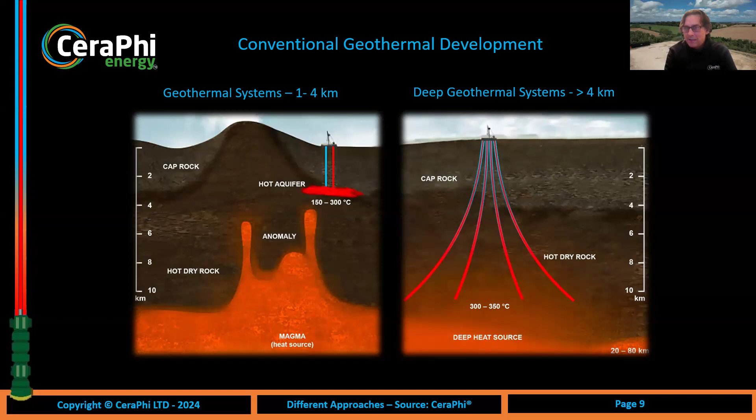But the majority of the UK is a good location for extracting heat to produce our heat networks and develop direct use heating and baseload energy.

Which basically means we don't have to go and necessarily burn gas or oil or diesel or something like that to produce heat - we can use the heat from the ground. That heat from the ground is very much the same principle as how ground source heat pumps work nowadays, but they're generally only drilled quite shallow, down to a few hundred meters, if that.

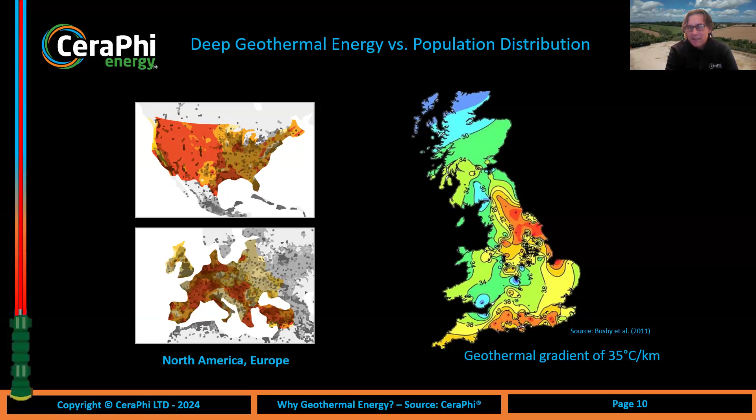You'll see if you look at the maps on the left-hand side, Europe and the US - there's lots of hotspots where it comes to geothermal energy, specifically around Central Europe and going down into Spain, over towards Turkey. There's a huge amount of opportunity across Europe and in a lot of the US, specifically the South Coast down to Texas, and over towards the western side of the US, where a lot of the US geothermal projects are currently being developed - what they call the Geysers area of California, etc.

There's a lot of different approaches to develop geothermal, and our approach is what we call a closed loop system. I mentioned the F word earlier - fracking - which a lot of people in our region in Yorkshire know very well, a word that has created a lot of turmoil over many years for various reasons. One of the things we eliminate by doing closed loop is that we don't have to frack, or use the fracking process to stimulate energy recovery, because we're not using the subsurface in the same way as you would if you were drilling conventional wells and flowing systems through them.

So we try to keep things very simple, drilling straight wells into the ground to a measured depth that we need to go to - I'll come onto that in a minute. Generally, once we do that, we then completely case and line the well itself, so we don't have any connection with the subsurface at all.

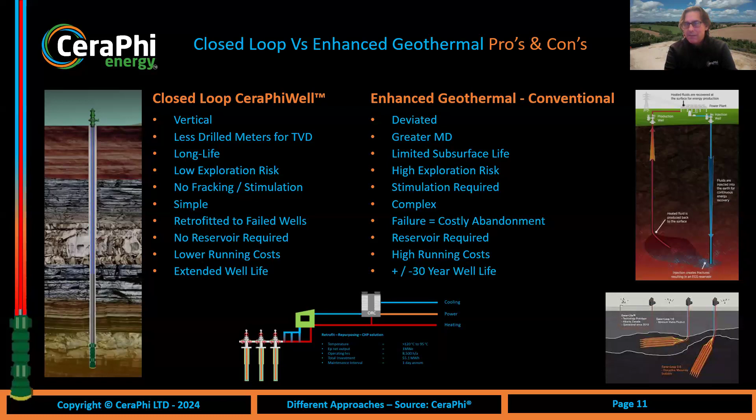So coming on to our technology a little bit now in how it works, very simply, it's like a tube in a tube process. We would ideally drill a well, or in the case of what we did at Kirby Misperton, the KM8 site, we already had a well. So what we did there is we just plugged the hole at the bottom of the well and used the well itself as the hole, without having to drill from scratch.

But let's look at the scenarios. If we were drilling a well, we would drill down to a measured depth that's required. That depth can be anything from 500 meters, maybe down to several kilometers in some cases. Our sweet spot of drilling depth for heat networks is normally between 1,500 and 2,000 meters. I say sweet spot because that gives us the working temperature we require to successfully manage what we call an ambient loop heat network system, suitable for putting multiple connections into properties, homes, larger commercial buildings, or infrastructure.

The actual closed loop system we install uses plastic pipe. So we are working with lighter materials, more advanced plastics, polypropylenes, these types of materials, which are getting better and better at thermal conduction and thermal insulation, meaning we get better properties and characteristics for the management of flow of materials and fluids around the system.

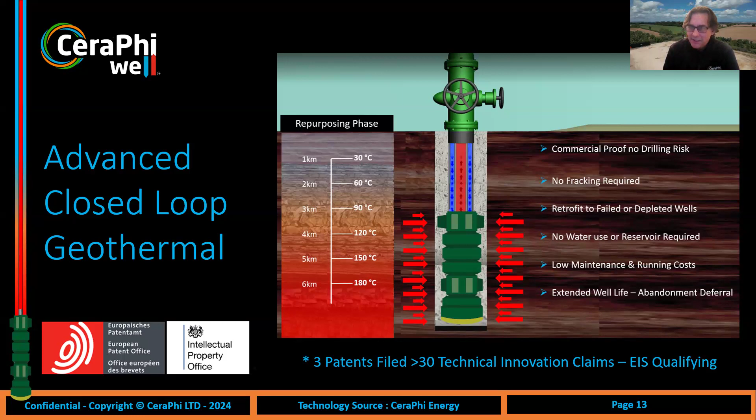And also, this pipe is a lot cheaper to make. It's a lot more environmentally friendly because, although it's plastic, it lasts a long while and it's fully recyclable. So you can actually use it over and over again, as opposed to creating a larger carbon footprint with manufactured steel piping. Also, you don't have the need to treat plastic pipe the same as steel pipe, with chemicals and corrosion inhibitors and things like this. So there's lots of benefit to using plastic pipe, which is one of the reasons we do this.

We work with what we call high, medium, and low temperature thresholds. I want to focus more here on the medium and low temperatures rather than the high, because high temperature is pretty unrealistic in most areas in the UK. So we are dealing with a medium and lower temperature rollout of technology here in the UK. But just to give you an insight, I've got slides here to show a higher temperature application we are looking at in the process.

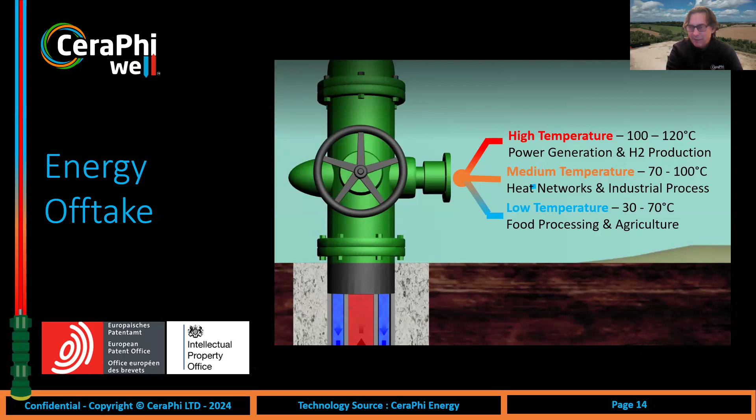Looking at medium and low temperatures, we can work with anything from around 30 degrees upwards. That 30 degrees is more than adequate for working with a heat network, a smaller heat network system, specifically into a village or a small community. 30 degrees is more than sufficient to carry enough energy to give people a very good quality energy from a base load perspective.

So we are an energy company. We develop energy infrastructure, and we are pushing ourselves to become a utility business moving forward. We don't want to be a B2C business, a business selling energy directly to a customer.

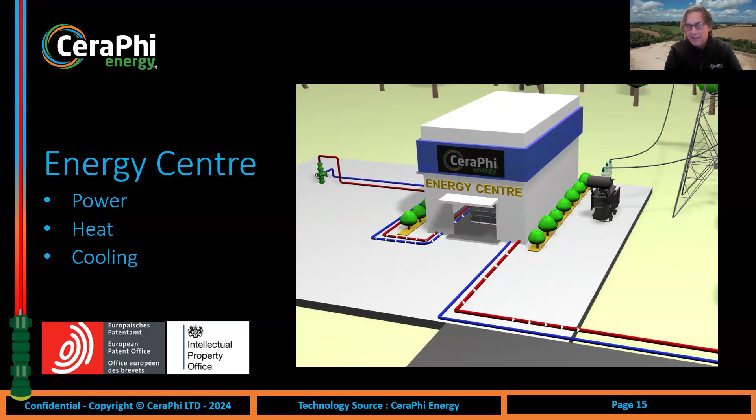Ideally, we want to be a B2B business, building infrastructure and selling it to someone like Octopus or Ecotricity, who then sell and commercialize the energy to a third party customer, i.e. a domestic user, etc.

We also have a very strong technology side in our software. Along with developing a hardware solution to deliver energy, we have a robust software package which helps us model, design, and optimize energy production, reducing cost and delivering projects in a more technically advanced way as we move forward.

So we do a lot of data gathering in the office, a lot of information technology modeling to give us a better idea and understanding of what's going on and how systems work.

We're also one of the first companies to ever install fiber optic and modeling software in wells to actually model and see what's going on in the well while it's producing and operating. So not only do we look at what's going on topside, we fully understand what's happening in the ground with the energy, and we're able to learn from that significantly.

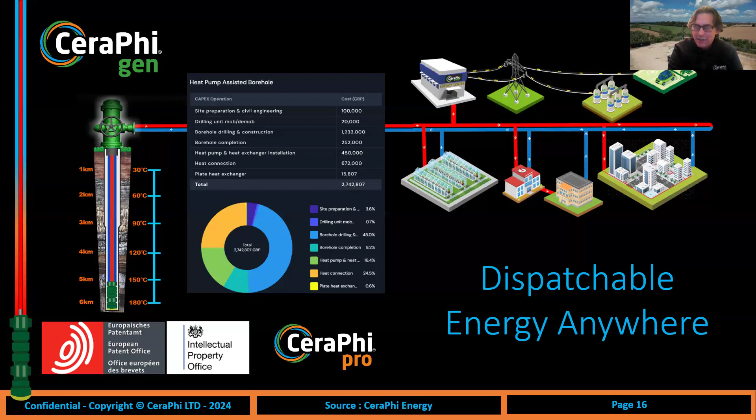So our business model, although we drill wells, as we've demonstrated with the assets in Kirby Misperton around Pickering, is that we are looking at repurposing infrastructure that was formerly designed for another use, primarily oil and gas wells, oil and gas infrastructure, but it can also be coal-fired power plants, gas-fired power plants, diesel generator stations, all sorts of infrastructure that started out life as fossil fuel driven.

We're now working with developers to change that infrastructure to run on clean baseload geothermal, connecting their existing customers to a clean baseload energy, rather than just decommissioning something and changing its use. We work across various different platforms in this way, and we're working with governments and organizations around the world in different areas, specifically emerging economies.

But we have around 680 wells in the UK onshore, and it's a big part of our infrastructure to learn how we can use and develop those assets and change them for a better energy source moving forward.

So where we are in the acquisition of Third Energy, we have purchased Third Energy. We did that later last year. In that process, we have also relinquished the licenses for hydrocarbons. So this is quite a significant step.

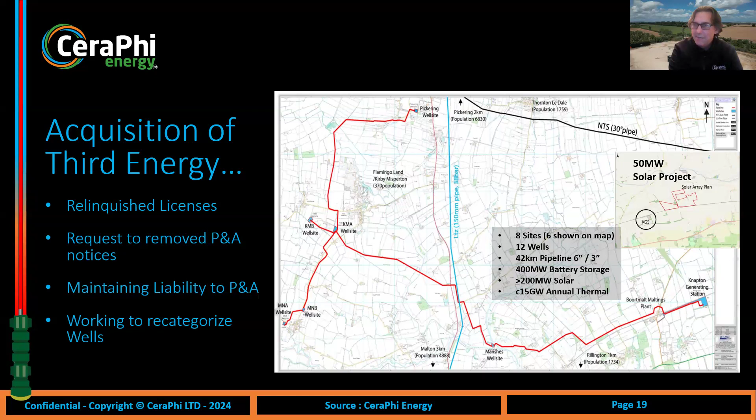So a couple of examples of some of the projects we're looking at here is district heating. We've been doing study work in different areas, in this case Little Borough and Great Hampton, looking at the villages and where we can potentially put clean energy from the existing well sites and wells that are there. We've been awarded some local grants for doing these studies, and hopefully in the next few months, certainly by the end of the year, we should have a much clearer picture on how we can go forward and develop these.

And that includes Pickering and also Kirby Misperton. We're actually looking at projects there as well.

This is a combination of looking at heat networks into the village of Kirby Misperton, but also looking at potentially building commercial infrastructure there. In this case, we're in discussion with a distillery manufacturer that wants to build some sort of distillery for the production of alcohol in the region. And we have a site, we have the energy, and we have the ability to do something there.

So we've got quite a lot of approval and support. We are running local community engagement programs with the village, and we tend to do that going forward with other communities too, trying to really engage with the local community to make sure there's a benefit out of it for everyone. Being able to get access to cheap, clean energy isn't easy when you're a village or small community, and the ability to actually rectify a right or wrong of a project that was started amid contention around the area, and use that for a good cause moving forward, has obviously got some value worth looking at.

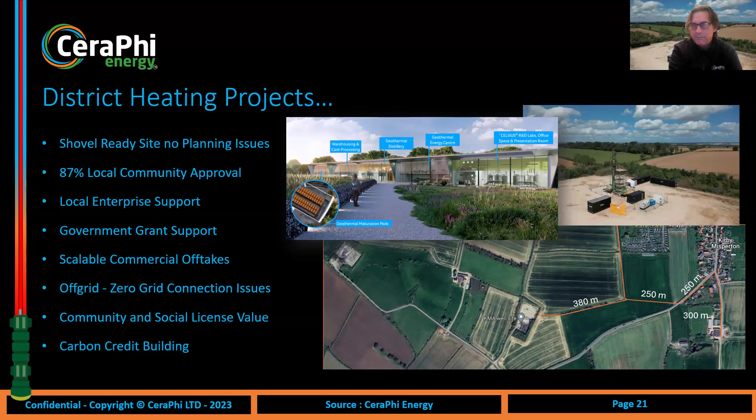So our development solution is fairly simple: it's trying to reuse what we can. Not in all cases will we be able to reuse what we can, but where we can and where it makes sense, we'll reuse existing infrastructure and sites. But it also might mean drilling or adding additional wells and maybe additional infrastructure to those sites.

So one of the things we do when we develop and design a system like a heat network — you need energy to run pumps, you need energy to run other parts of the system. So rather than trying to plug that energy in and take it from the grid network, what we try to do is build resilience around the site to run the energy directly from a single source, which is normally something like battery storage and solar.

So what we build in is just a small part of that — we're not talking about fields of solar or anything like that, we're talking about enough solar panels to cover the running of a pump or pumps on a site, which could be a few hundred kilowatts. But what it does mean is we're not relying on the grid, and we actually make the project effectively an off-grid solution, meaning the customer or end user has complete clarity on energy costs, and there's no fluctuation in utility costs over the lifetime of the project.

And we can tie this in with other commercial opportunities, which could be, as I said, distilleries, could be agricultural use, and there's also the wider picture of then linking up other communities into wider heat networks or heat systems moving forward.

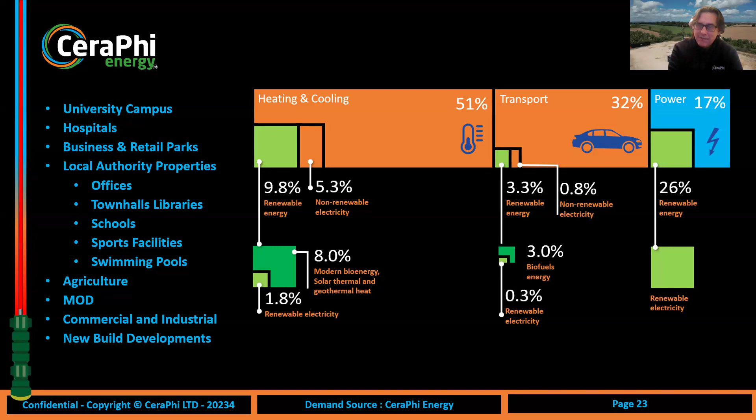All these things are what we call key anchor loads. If we can help decarbonize these directly, we can then help decarbonize local properties, residential properties and domestic users a lot easier, because you need a big anchor load to help commercialize this development. The more bigger infrastructure we can install, the easier it is then for us to pass that down and help domestic and residential users decarbonize as well.

So one of the other areas we're looking at is power generation. We are doing power generation, although it's maybe 5% of what we look at. This is a project we've been awarded in the Caribbean, on an island which is volcanic, and at roughly 2.6 kilometers, they have temperatures of around 230 to 250 degrees.

At those temperatures, with the depth of the wells we have there, we're able to generate power. This works here as well, because the cost of power on islands is a lot higher than it generally is. Even though we're an island in the UK, our cost of electricity compared with most islands around the world, or most emerging economies with growing energy demand, is exponentially bigger than what it is in the UK.

For example, places in Africa where we're currently looking at projects have energy costs at the moment around $400 to $500 per megawatt, where we're paying 30 to 50 pounds per megawatt. So we're talking 10 times or more the cost of energy in some of these countries, which makes doing projects for power a lot more economical.

It costs more to drill deeper, it costs more to drill hotter wells, but the economics work out when you can sell energy for a higher premium in these countries and still produce baseload clean energy for them. Even at $150 per megawatt, which this project is, it's still commercially very viable, probably half of what they're paying today for their energy generation.

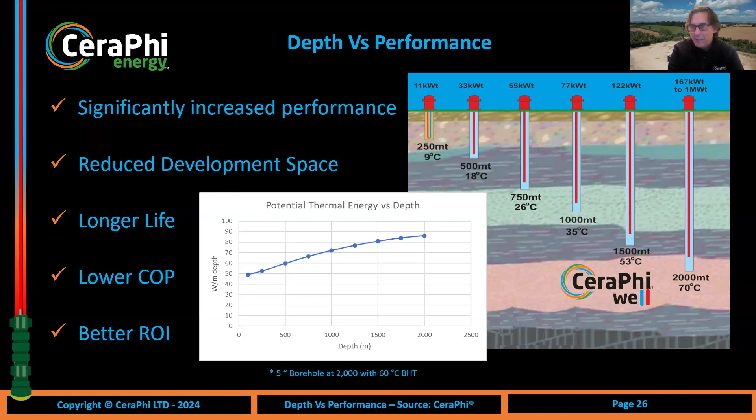We're not bringing in big oil and gas drilling rigs to do this. We're using what we call geotechnic rigs, the style used for coring and boring holes around the UK on a regular basis, even in the water industry for boring and coring water holes. We're adapting them, putting oil and gas technology on them to drill deeper and more cost effectively with these smaller rigs, in a space that's predominantly been dominated by oil and gas. Because it's been dominated by oil and gas, the cost of doing it has always been prohibitive, so we're trying to drive that cost down by being creative and innovative with how we deliver these wells and move forward.

We're also doing this by adapting the use of other materials like plastics, polymers and polypropylene pipes, increasing the working temperature environments for these pipes and also the design pressures, by working with manufacturers to do that. A lot of the manufacturers we've approached, asking if we can push the working temperature of these pipes from 90 upwards, immediately said yes.

You know, why do you need it? And we explained it, and a lot of these manufacturers had never been asked to produce pipes higher than that, because a lot of our working temperatures for heat networks are around 80 to 100 degrees Celsius. But if we want to move forward into the next generation, we also have to look at power generation as well, not just heat.

So we want to take the temperature of these pipes up to 150 degrees. We want to increase the operating pressures of these pipes to increase integrity in the system, to avoid any spillages and design failures moving forward. But at the same time, it allows us to step into a different world of power generation, as well as just heat.

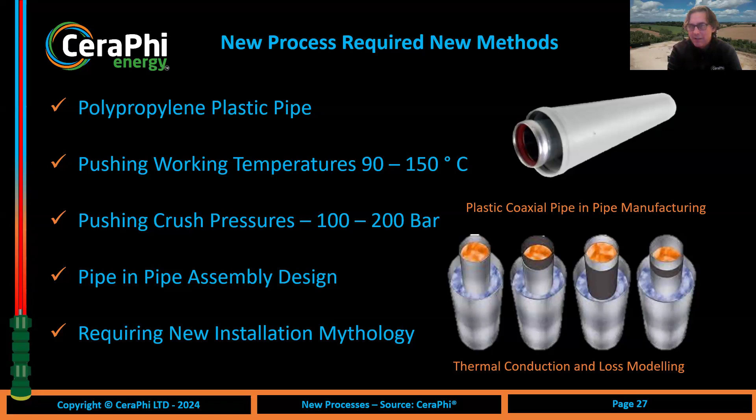This is about the same size as the rig we had on our Kirby Misperton site last year, which when we brought it through the village, nobody even knew we'd brought it in. When we set it up, nobody even really knew it was working. So unlike historic events where people complained about drilling, these rigs are very small, lightweight, and don't make a lot of noise at all - not enough to warrant any formal issues.

There is, like every rig, a noise of operating, but very, very small and low in terms of decibels. These rigs work on less than 70 decibels noise, which is well below the operating limits of machinery in public places. There are also electric rigs.

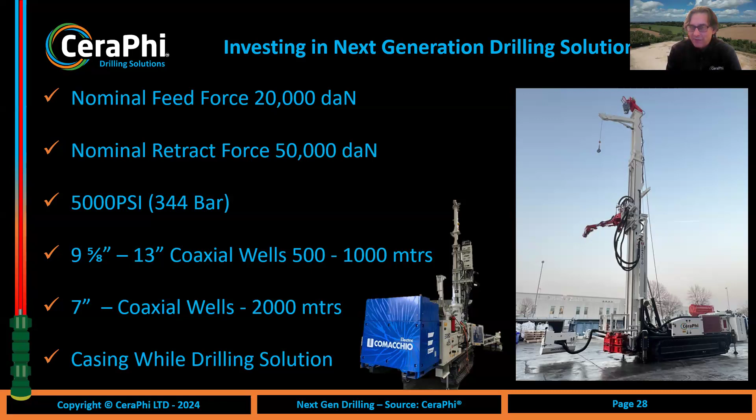Some of the things we're doing in the region and globally is really looking at increasing innovation and technology in this space, which will in turn increase labour and supply chain applications. So we're working a lot with suppliers, colleges and institutions to train and develop people - bringing existing skills into a new generation of application. Hopefully that will create jobs and more innovation in the local community, and in future development for keeping projects moving forward, so we can build a workforce using existing skills across E&I, mechanical, electrical, instrumentation type skills, but also heating and cooling, ventilation and these types of areas, bringing them into the next generation of innovation and technology.

And this is really what we're doing. We've even tried, on the local projects up in Kirby Misperton, working with the local areas last year, to use as much local labour and local suppliers as possible, increasing the local area where we could, for helping the economy, and we continue to do that. Where we are is trying to drive that innovation and drive it locally.